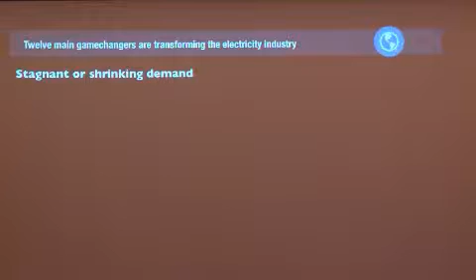Demand is more likely to go down than to go up, especially with regulatory reform that rewards lower bills, not higher sales.

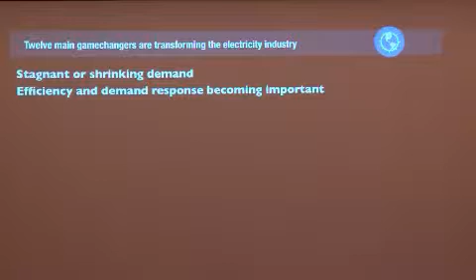Efficiency and demand response are very cheap, and in 3/5 of the United States, they can bid directly against electricity generation in auctions run by the grid operators. In a recent big auction, 94% of the winning bids were from the demand side.

Expanding returns to efficiency investments are also emerging, as I'll describe at the end.

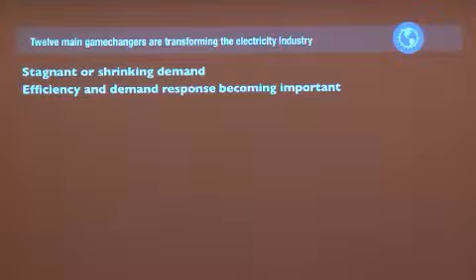Massive supply shifts are happening. Coal is going away in the world market. Nuclear is also fading as too costly to compete. Gas is improving but not cheap—prices are volatile and rising. And renewables and combined heat and power are taking over the global market, as I'll summarize in a moment.

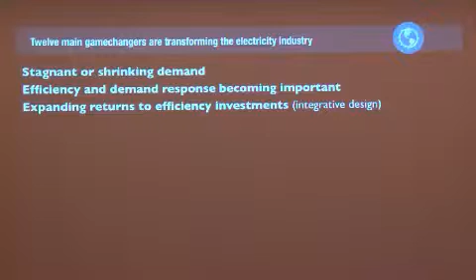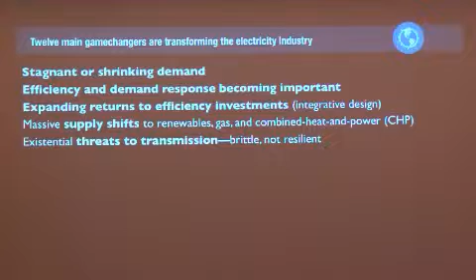There are existential threats to transmission as well. It is hard to build, especially in densely populated countries. It's fatally vulnerable to accident and malice, and resilience is becoming vital.

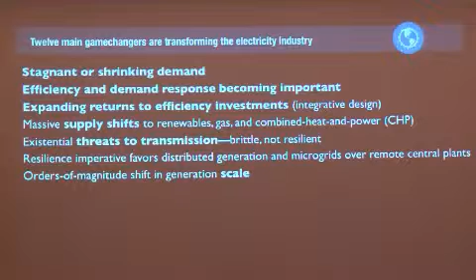I've mentioned the order of magnitude shift in the size of generators. Electricity systems are losing financial stability. And it's a little like what happened in the telecoms industry with cell phones.

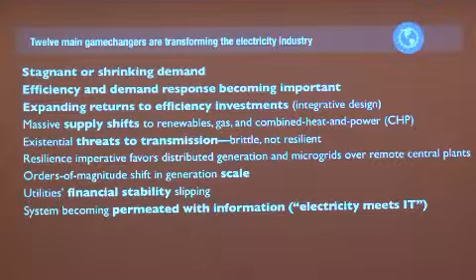The systems are becoming permeated with information—it's electricity meets information technology. So demand is becoming flexible, the grid is becoming more agile, and the need for central control of the grid is decreasing as intelligence becomes more distributed.

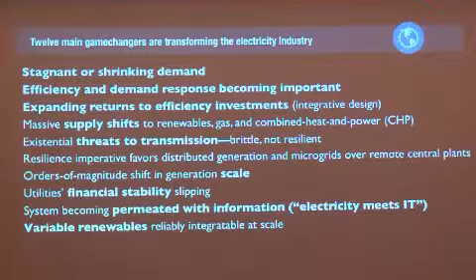Customer centricity is reshaping everyone's business and revenue and regulatory models, as utilities, customers, and a huge number of other entities compete not just in making electricity, but in providing many different services that electricity delivers to the users.

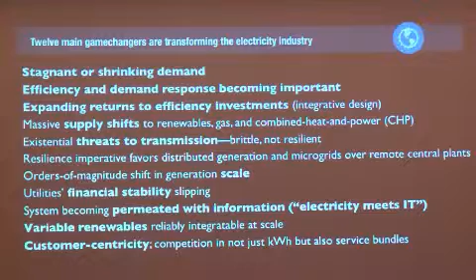So, will electricity institutions reform, learning to integrate variable renewables at scale? Will they reform before radical bypass shatters their old model?

Well, nobody knows, but as Jack Riggs says, the industry is entering a new world—more complex, dynamic, volatile, global, nonlinear, digital, virtual, and distributed.

Insurgents, he says, thrive there, unburdened by the legacies of physical and political constraints. No other industry, not even IT, is facing such a typhoon of swirling and potentially destructive changes all at once. These are exciting times.

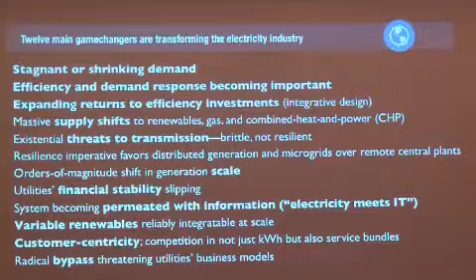Now, the world does continue to build fossil-fueled power stations planned long ago. The annual changes in operable capacity worldwide went down for nuclear. They've been going up rapidly for solar photovoltaics and for wind power. They have risen some, tailed off a little for hydropower.

And they're still fairly high for fossil fuel. Most of those plants were planned back in this period. And there was a big spurt in China, but two-thirds of those plants were not authorized by the Chinese government. They were built illicitly at local initiative. So no more nuclear plants are being ordered in any market system, only in centrally planned systems. But renewables now get more global investment each year than fossil and nuclear stations combined.

Renewables have added half of all new generating capacity in the world starting 2008, and they now add slightly more capacity than all non-renewables combined. Note that curves here for photovoltaics, for wind, these two will cross this year, and for other renewables not shown must be added together to make the renewable total, which is up here somewhere in the 80s of gigawatts added per year. And renewables costs are falling so fast that last year they got 12% less nominal investment than the year before, but they added 6% more capacity.

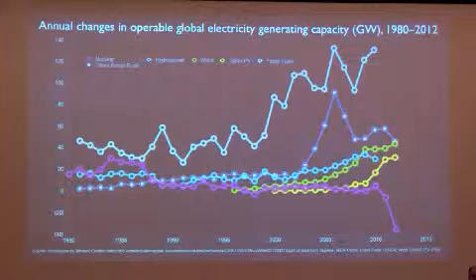So let's look closer at the two main kinds of non-hydro renewables, wind power and photovoltaics, and these are their annual net additions in the world. The capacity to make solar cells is now about 75 gigawatts per year, twice the rate at which they are being installed. But huge growth in China and increasing use in Japan will quickly soak up that surplus.

Electricity generation has become a scalable manufactured product, like making chips or mobile phones. It used to be that you had to build a multi-billion-dollar power station. It would take 10 years. But now, in those 10 years, you can build each year a photovoltaic factory, which each year will produce enough solar cells that each year those solar cells can produce as much electricity as your station would have produced after 10 years of construction. So the scaling is utterly different.

This is why all the old forecasts are wrong. They have not yet realized this new market reality. And thus solar cells are now scaling faster than cell phones did. Last year, China got more new electricity from non-hydro renewables than it got from nuclear and fossil plants combined.

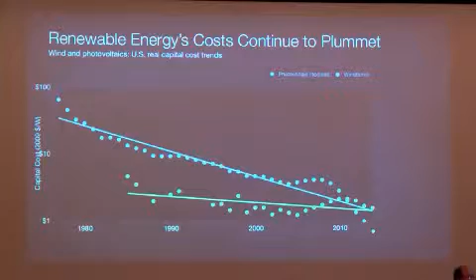And by the way, if you need any further proof of the global shift toward distributed generation, what the Economist magazine calls micropower, which is cogeneration plus renewables minus big hydro, has now more than exchanged its share of global electricity production with nuclear power, just because of superior economics.

Now, per hectare, Japan has 9 times the high-quality renewable energy resources of Germany, and yet Japan generates, excluding hydro, only 1/9 the renewable share of its electricity that Germany does. So why does Japan use least its most abundant energy resources, despite paying some of the world's highest electricity prices? Simply because Japan's utility oligopolies have for decades blocked competition in order to protect their old power station assets.

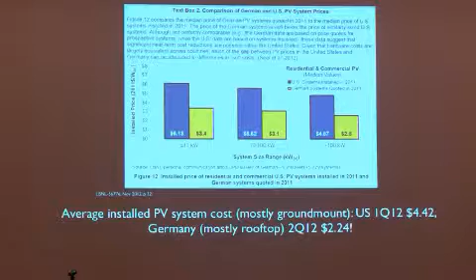So, of course, many of us then examined how Germany and also Australia are achieving such low balance of system costs. And then our installers started to use the same innovations. And some of our installers have already cut this balance of system cost by 50 to 70%, and some think in another year or two they will have cut it by 90%. This would actually beat the Department of Energy targets and bring photovoltaics to grid parity essentially everywhere.

And you can do the arithmetic that if the kinds of annual growth that are common in the mature microchip industry were applied to photovoltaics, it would take only into the 2030s or at most 2040s to have enough photovoltaics to meet all United States electricity needs in this way, although actually we would buy a mixture of different sources.

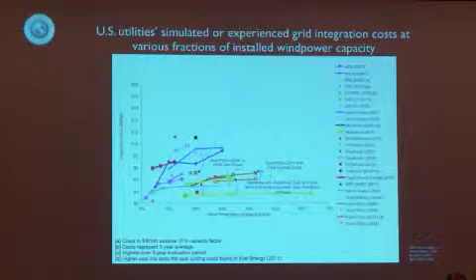Many people also suppose that it will be very expensive to integrate renewables, say wind power, into the grid. Well, many American utilities with many different conditions have studied if you have this much of your capacity coming from wind power, here's how many dollars per megawatt hour it will cost to integrate it into the grid. And it's typically just a few yen per kilowatt hour. It's a few percent extra cost, and it's probably less than the costs of integrating big thermal stations into the grid, requiring big reserve margins and spinning reserve and so on. We need to count that also.

Of course, if you allow renewables, let alone efficiency and demand response, to compete fairly against new supply, as we now do in 3/5 of the United States, what would you expect to happen? Well, this condition actually was tried a long time ago in California when they had 37 gigawatts of peak load. And the result was that in less than 3 years of bidding, they got much more than that,

143% of their peak load in distributed generation, mostly renewables, that had been bought or was offered, and also in efficiency they had bought. And they had to stop the auction because in a few more months they would have had to close every fossil-fueled station in California, which would have been a good idea. But I think this suggests that if you really have full, fair competition, even with old technologies, much worse and costlier than today's, you'll probably have too many options, not too few.

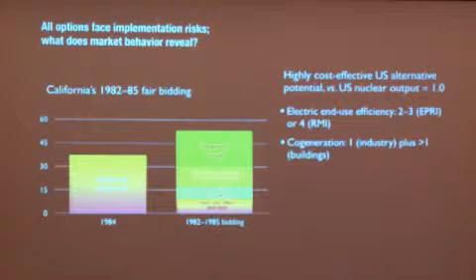Perhaps that's exactly why Japanese utilities are so afraid of such competition. It gives more choices than they are offering. And these are extremely large resources. I don't think we need to go into that now, but they're much larger than we need.

Another common myth is that solar and wind take a lot of land. Well, I recently did a peer-reviewed paper reviewing this claim and found that exactly the opposite is true, that actually photovoltaics on the ground have the same land use as the nuclear fuel cycle according to the official government assessment, or zero if you put them on buildings, as most now are. And if you put them on just a few percent of US buildings and other structures, that would give all of the annual US electricity needs.

Wind power has about 1 or 2 orders of magnitude less land use than either of the other systems, and thousands of times less if you don't need to build dedicated roads. And the common fallacy here is to count as land use the area that the solar or wind equipment is spread across. But in fact, this land is widely used for other purposes. 99% of a wind farm's area is used for farming, ranching, or wildlife or recreation.

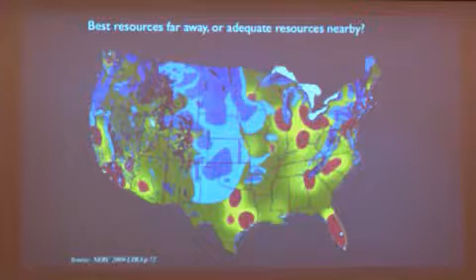So I think we need to look at this sort of pattern, as also in Germany, where they've now canceled half of the planned transmission expansion, and the latest studies say they won't need the other half either. And especially as we get new wind machines just entering the market that operate very efficiently with low wind speed, this changes the picture completely.

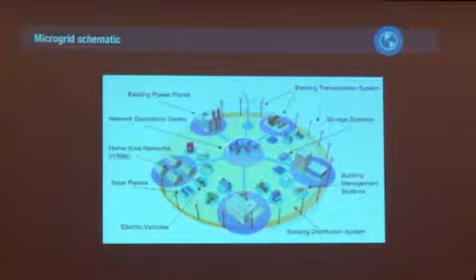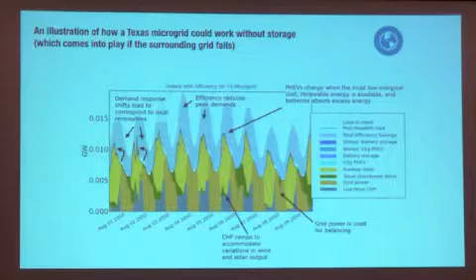It's been used in Cuba, it's been used in my own house to let the local generator work with or without the grid. And there are hundreds of examples worldwide of microgrids that have been analyzed in detail and showing how they would work even without the grid to avoid big blackouts. I'll just skip some of these.

Cuba actually went from 224 blackout days to 0 in 3 years. And then when 2 hurricanes in 2 weeks shredded parts of the grid, they were still able to maintain critical services in the rural areas.

Now, resilience is a very important argument for distributed microgrids that can disconnect fractally, reconnect seamlessly, using, for example, gas-fired cogeneration, using local renewables like solar power on your roof in a way that works with or without the grid. But there are also powerful economic arguments, which we set out in this book in both languages,

showing 207 distributed benefits, mainly from financial economics and electrical engineering, that can increase value often by about tenfold compared to central stations. And our eLab has just published a nice summary of such analyses. I won't go through all the detail of it, but showing that often the distributed benefits are worth as much as the total cost of solar power or more.

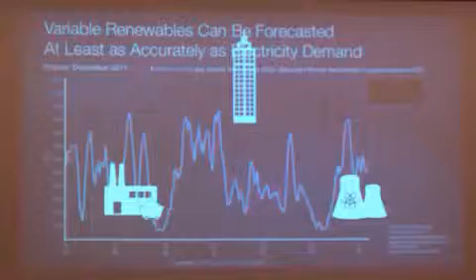Now, I'd just like to show you a quick simulation here about how the grid is constructed. Many people say that we need the fossil-fueled and nuclear stations to keep the lights on because they run all the time, but solar and wind power are variable and thus supposedly unreliable. But actually, no power station runs all the time. They all fail. And when they fail, you lose 1,000 megawatts without warning, typically for weeks or months.

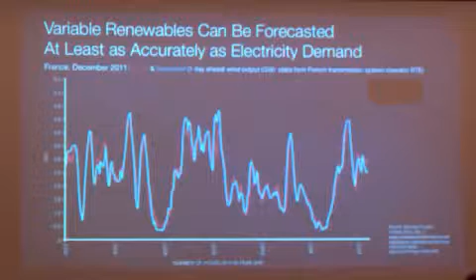But both parts of the statement are wrong, because variable does not mean unreliable. The blue line is the forecast of French wind output during a very stormy month. The red is the actual output 1 day later. In other words, the day-ahead forecast was extremely accurate. And we can now forecast both solar and wind power more accurately than we can forecast demand.

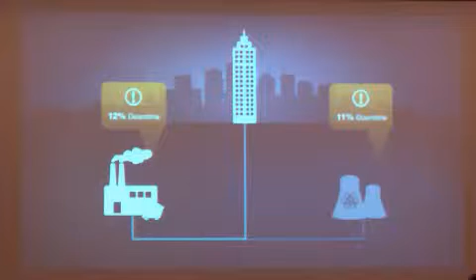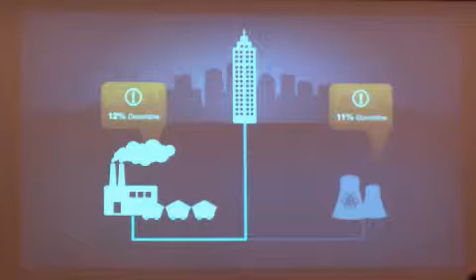But also, when these big plants fail, the grid is designed to back up failed plants with working plants. And in exactly the way that the grid manages this intermittence of big thermal stations, it can also manage the forecastable variations of solar and wind power. So very detailed studies in Europe and in the United States have shown that you can, in fact, run a highly reliable grid on 80, 90, 100% renewables.

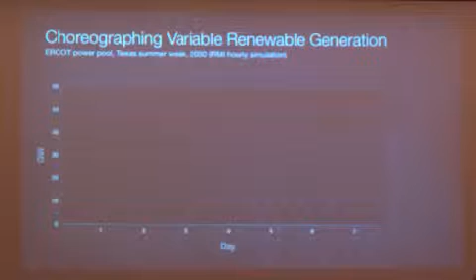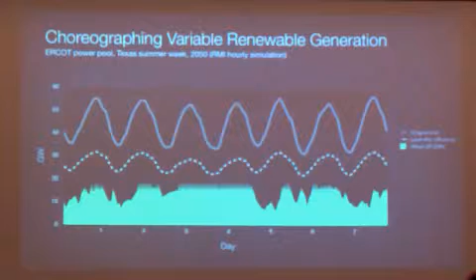And I want to show you at the end here one very striking example that we simulated for the isolated Texas grid, which in 2050 should have a summer load shape in 1 week like this, or smaller and less peaky with profitable efficiency. Now, let's meet all of this with renewables. And this grid is not connected to the rest of the United States. It's just Texas.

So we first put in wind and photovoltaics. You can see they do vary a lot. Then we meet the last 14% of the annual electric needs with other renewables that you can have whenever you want.

Geothermal, small hydro, solar thermal electric with storage, burning municipal waste, burning biogas from the cattle feedlots in combustion turbines. So we're now 100% renewable, but you can see it doesn't very well match the load curve.

But now we can take the surplus and put it into distributed storage in smart electric vehicles and ice storage air conditioning, get it back when we want it, and then meet the last bits with unobtrusive demand response. So now we have fully reliable electric supply every hour of the year, and only 5% of the renewable generation is left over to be spilled. So the economics will be very good.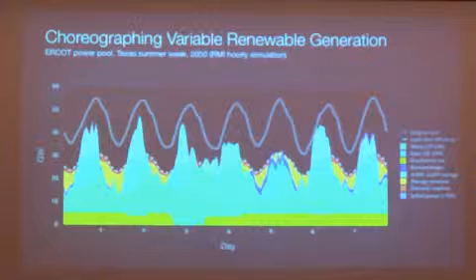And I think this is really the way forward, and the reason that the chief energy regulator in the United States says that these big thermal plants have become an anachronism and we may not need any more of them ever. So I end with this set of numbers for you to think about. We're often told that renewables can only play a small role in electric supply.

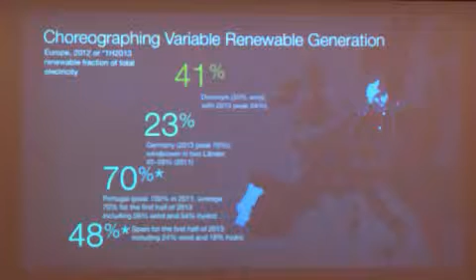Well, different laws of physics seem to apply in Europe. 23% renewable electricity all last year in Germany, 41% in Denmark, and they had the most reliable electricity in Europe. In the first half of this year, Portugal's power was 70% renewable, up from 17% just 8 years before. Spain, 48%. The lights stayed on just fine, and some of the operators say, we hope we never go back to the old system. It's so dull compared to this.

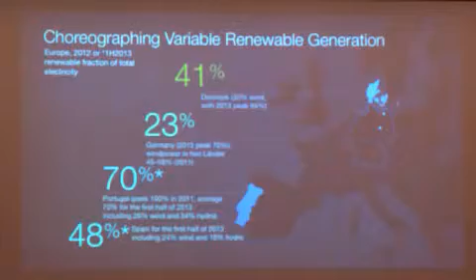Thank you very much, Dr. Lovins. I'm sure you understood that the whole world is heading into a great transformation to a distributed, renewable-centered system. We have recently published a brochure at our foundation, which is based on this.

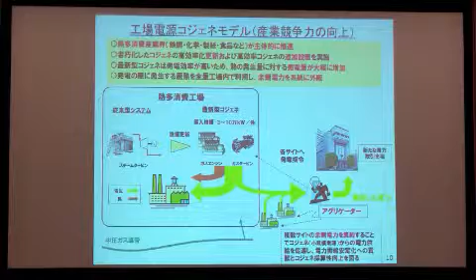For sales of surplus power in the market, starting last year, a green energy market has been set up, and the trading in the green energy market has started. We aggregate about 20,000 kilowatts of power.

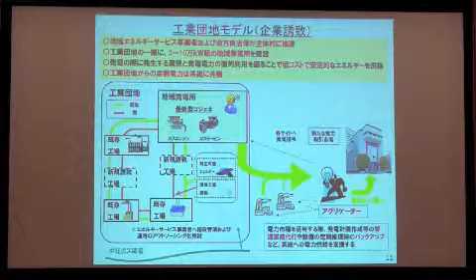And we sell in the market. So that's a plant-based power supply model, and this one is an industrial estate type of power supply model. Consideration and study is being underway in multiple sites.

And the final model has to do with the urban development model. Based on the experience of the March 11th earthquake, in urban areas, these building complexes, commercial buildings and shopping centers, about 50% of the usual demand, if that can be supplied by a standalone type of own power supply, even if there is some failure on the grid, the security power supply can be secured.

For example, there are many elevators, so one of those elevators at minimum can be operated even if there is a grid failure, and air conditioning would also work. Also in case of disaster, we would like to accept people visiting the site or the neighborhood, and that will lead to a business and living continuity plan, we feel.

So a certain size building complex in the development of such city complexes, a certain amount of standalone power supply will be installed. In case of development of a building of 200,000 square meters, power demand will be about 10,000 kilowatts. And if cogeneration is half of that, and if we assume 43%, then we will be able to introduce generating capacity of 43% efficiency gas turbines.

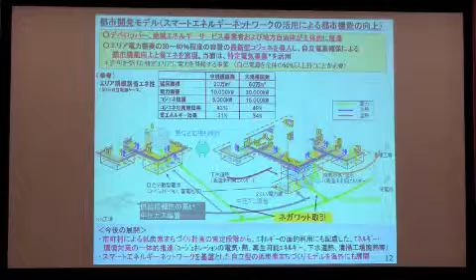In the future, dynamic pricing for power trade may set the peak power price very high. If that happens, peak load must be reduced, and for that, negawatt trading will be useful. If that can be used, economic viability will improve further. For that, low carbon type of city planning will be very effective, and I think we'll be able to contribute overseas as well.

This is not part of your handout, and this data is not made public yet. It's being compiled by the Advanced Cogeneration and Energy Utilization Center. Currently, about 10 million kilowatt cogeneration will be increased threefold by about 2030 to about 31 million kilowatts.

That's the installed capacity, and the total generation will be 155 billion kilowatt hours. That means about 15% of total generation can be supplied by cogeneration.

Through the shale gas revolution, we expect the natural gas share will be reduced from the current 70% to 60%. And then we will be able to introduce power supply based on relatively low cost.

Also, there will be further deregulation and introduction of fuel cells for household use. If we add up all these effects and benefits, I think we'll be able to contribute to restructuring the overall energy mix and energy use in Japan.

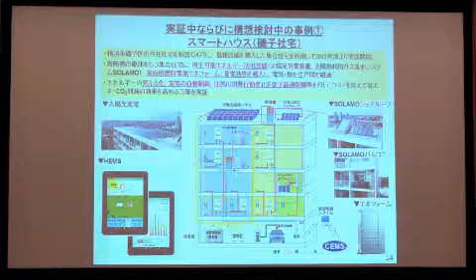Overall integration is done by the community energy management system. We are doing demonstration and testing of fuel cells, not just one or two introduced, but 2 fuel cells introduced per unit, and we share the power among the units. So with visualization and such integrated control, the power demand can be reduced by more than 20% according to our results.

As for home fuel cells, from 2009, as you can see here, PEFC, or polymer electrolyte fuel cells, has been sold. Right now Panasonic and Toshiba are selling PEFC with 39% power generation efficiency, and more than 90% of total efficiency can be gained if you use up all the power.

And as a next generation, SOFC, or solid oxide fuel cells, have been launched. I just started.

At high temperature, the efficiency of the generation is more than 45%, higher than the grid efficiency, and the overall efficiency is more than 90%.

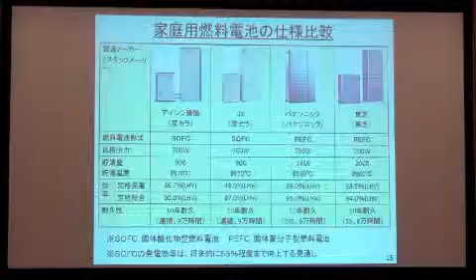Now for the fuel cells, this started in 2009, and now at Tokyo Gas about 30,000 units, and nationwide 70,000 units have been installed.

There's still a subsidy system, 450,000 yen per unit of subsidy, and the end user's initial burden is about 1.2 million yen. By 2015, the subsidy system will remain. So towards that, we are working on reducing the cost so that after 2015, the end users' cost burden will be reduced to 800,000 yen. That's our target.

800,000 yen - if that is achieved, and it has hot water supply equipment, it can be recovered over 10 years or so. 50 to 60,000 yen of energy saving per year in the detached house, which can be recovered in 10 years. That's the model we're targeting.

It will be introduced to the condominiums, and also with the expansion of electric vehicles, the similar technology can be applied for further cost reduction, and also to roll them out overseas.

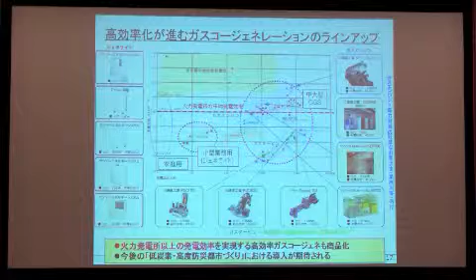But for a smaller system, the fuel cells have high efficiency, whereas the gas turbine efficiency goes down. So for a smaller scale, fuel cells, PEFC or SOFC, utilizing waste heat or hybrid type turbines, can gain more than 50% efficiency. So with such a product lineup, we would like to promote cogeneration.

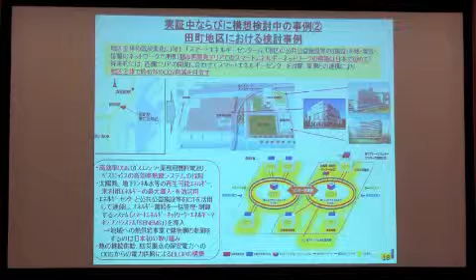Now, in the town building models, let me share some case examples. In front of Tamachi station, this is the development we're working on. After 2014, the buildings will be built starting next year, with high-efficient cogeneration combined with solar power, with photovoltaic, made into a network.

Using ICT, it will be controlled. So the smart energy network, energy management system, SENEMS, together with Hitachi, is being developed right now.

From the Energy Center, the data on the demand side is looked at. So rather than simply supplying energy as needed, there's control from the demand side - a demand response. So the optimal energy control system will be introduced.

As we do so, be it renewable energy or less CO2 emission energies, it will be prioritized for usage, to promote CO2 reduction and energy saving.

As for others, in Nihonbashi Muromachi, done by Mitsui Fudosan, total floor area is 1 million square meters, with 50,000 kilowatts demand, so 25,000 kilowatt cogeneration for power in case of emergency.

In any accidental case, to have self power generators and cogeneration that can operate continuously, so even for a long period of blackout, about half of the power demand of these buildings can be accommodated.

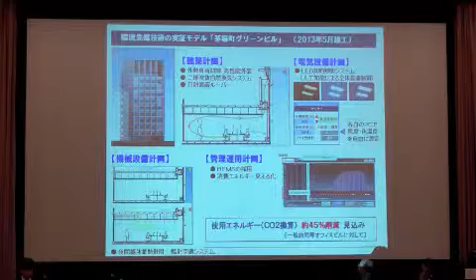There is an intelligent lighting system, and the user can choose the optimum control, and also near real-time type of energy use, so power use is made somewhat visible to the users. On top of the visualization of energy consumption, whether this will be linked to demand response or not will be the issue for the future. The estimate is 45% energy consumption reduction.

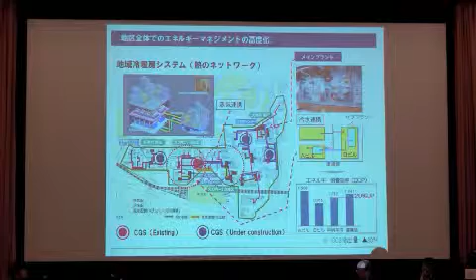So depending on the management of the completed buildings, the heat use or heat consumption changes. So in the future, in addition to introduction of cogeneration, heat and power will be produced in a synchronized way. So energy management has to be made more advanced in this kind of an integrated way, and that will be a challenge going forward.

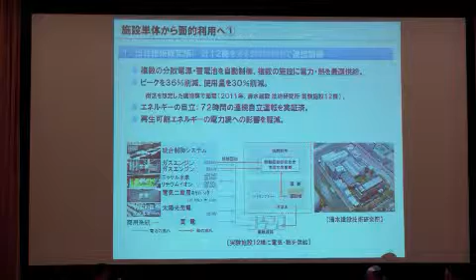So the first example is our company's Technical Research Institute. There are 12 buildings, and they are connected through the microgrid. In 2006, this was completed. And according to this data, as of 2011, 36% reduction at peak, and the usage was reduced by 30%. Gas engine cogeneration and batteries, nickel hydride and lithium ion, electric double-layer capacitor, and renewable energy photovoltaics with some power purchase, using waste heat of cogeneration.

And with this as a case example to be rolled out to others, this is Chubu University with 12,000 students in Aichi. In accordance with the campus plan, the life science faculty built a new building. For this new building, smart BEMS, cogeneration, photovoltaics and storage batteries are introduced, and with this as a core, by faculty department basis, this will be expanded, and at the end, the entire campus will be made smart. Step 2 was completed in summer this year, and they're now moving into step 3. As of last summer, 25% power saving and 30% energy saving was achieved.

Likewise, from a single facility to create an area energy network, if there's a new building or a large-scale retrofit renovation, by focusing on that particular area and neighboring buildings, provide heat and energy so that we can improve the BCP or accommodate a peak. So key technology is distributed energy, renewable energy, or batteries. So in an area-wide way, to operate smart BEMS will be necessary.

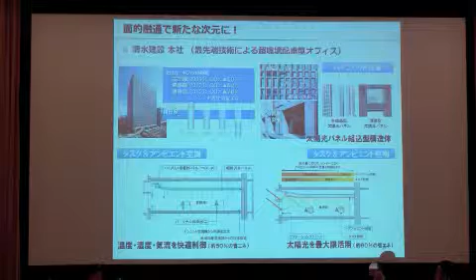And for AC, task and ambient AC, using a radiant panel ceiling, and desiccant AC is used for adjustment of the humidity from outside air. So cooling water is supplied from the DHC system, or instead, chemically to absorb. But if you just keep it absorbed, it would saturate. So using waste heat to recycle.

So we get the heat supply from the area system. At the top is the existing system of coming back with 6 and going with 14. But the radiant AC is functioning between 16 and 18. So 14 or 15 degrees of cooling water that comes back are used as it is to cool our building. At this temperature, there are several in the natural environment, so this can be applied in wider areas going forward.

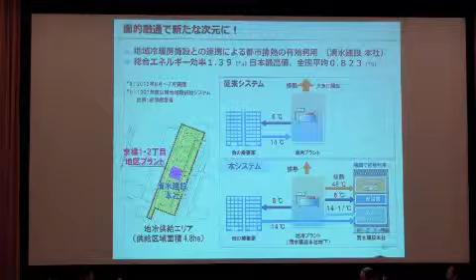And for desiccant AC, to recycle the absorbed, and here the water is to be released. Waste heat is used to produce cold water. So 1.39 for the comprehensive energy efficiency, which is Japan's highest figure now. So to promote this is very important.

So there are many ways to develop cities, but there are three ways. First is a disaster prevention type, enlarged redevelopment type. And as Mr. Muraki of Tokyo Gas explained, those large-scale projects such as Tamachi Station are included here. But it's not that there are many of such large redevelopment types. So in the existing buildings, how can we expand the area? So we call it the sequential development type.

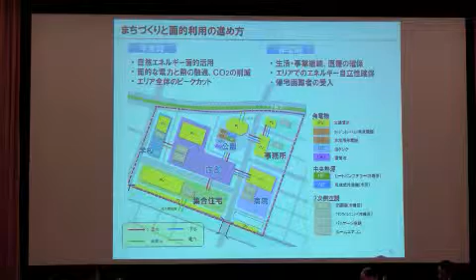As you can see at the bottom, in a certain block, if there is a new building, then focusing on that new building by introducing cogeneration or batteries, for maybe 3 buildings next to it, interchange the heat and energy to improve the energy efficiency and improve the BCP. So this is one example for simulating that. And with that as a base, we have identified some challenges.

Or in reality, there's even more difficulties. We are a design team. There are challenges at the planning and design stage. It's very difficult to get the consensus building on area energy network from the initial design stage. So to motivate the related people to reach a consensus, such incentives or regulations will be helpful, and it requires a certain initial investment. So it's very difficult to make it profitable. And if you are to work on this, the demand side may actually decide to stop participating. So the risk avoidance on that would be a key as well.

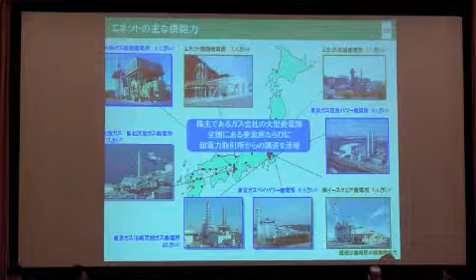Very clean natural gas power is supplied from Osaka Gas facilities, and we buy power from 150 locations all over Japan, and we sell it to our customers. In terms of the power supply, about 70% are from Osaka and Tokyo Gas natural gas fired power plants, and then renewable power sources, wind power, photovoltaic, bio and mini hydro. On the upper left, this is in Hirokawa of Wakayama Prefecture, and it's a wind farm. And under that is Miyazaki Solarway photovoltaic power plant, and also a biomass generating plant.

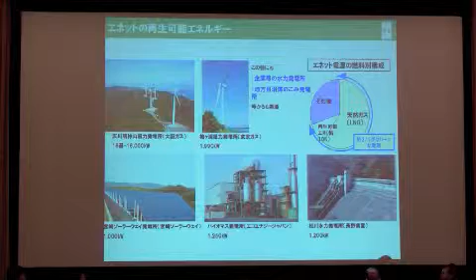So we buy these clean power sources, so it's a very clean energy mix. And we have about 15,000 to 16,000 customers. Last year it was 10,000, but in one year we were able to rapidly increase the number of customers by 5,000 or 6,000, covering from Hokkaido to Kyushu. Unfortunately, Okinawa is an island, so excluding the area covered by Okinawa Electric Power Company, we provide electricity and services.

And ENET's power sales per year is 10 billion kilowatt hours, so it's slightly more than that of Okinawa Electric Power Company. Having said so, however, and this is a problem, the share of the PPS, the new entrants, is only about 2% of the total power supply, and we work to pressure the government, and various systems have been set up, but we'd like to continue to increase. And among the new entrants or PPSs, ENET's market share is 50.5%. That's all for the introduction of our company.

Since the March 11 earthquake, customers' awareness has changed. Before the earthquake, cogeneration was positioned in terms of energy conservation, economic viability and CO2 emission benefits, but since the earthquake, power saving or emergency security improvement, BCP, energy diversification and introduction of renewable energy sources. So the customers' awareness has changed greatly, and we need to cope with the time of tight power supply, as well as with emergencies and disasters.

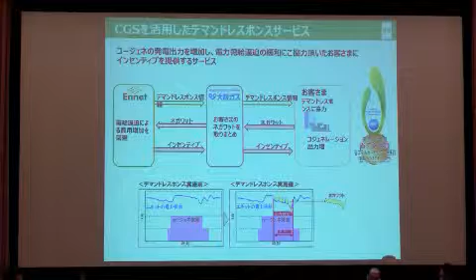And there's a negawatt aggregation service and a smart network service. Using cogeneration, this demand response service was awarded the Energy Conservation Award last year. ENET and Osaka Gas jointly developed this service, so ENET, Osaka Gas, and customers are involved in this process. So in case of tight power supply, some cogeneration may have stopped operation, and we request the cogeneration plants, if they have some room, to increase power supply. And for customers who comply with the demand response, we give incentives.

And there are various advantages or benefits. In terms of economic viability, customers' cogeneration load may be reduced, or some of it may be unoperational. But by introducing incentives, we will be able to reoperate some idle cogeneration power. And if we have to buy power from outside on a spot basis, that will mean increased cost. So by implementing demand response, we can reduce this costly spot procurement. And this is a win-win-win model for all the stakeholders.

And this is an actual example. There is some time period in the middle where the bar chart is lower. This is when the customer operated the cogeneration unit, and the purchased power went down.

And this is an example of a smart community project in Miyako City, and this is going to be implemented in the future. There are various benefits of a smart community, for example for the local power source, local customers, or local new entrants. For the local power supply, they can make use of the feed-in tariff, and they can secure a stable supplier. So biomass, photovoltaic, and mini hydro can be used.

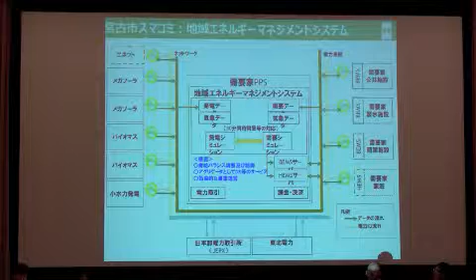So local smart communities are being discussed in various parts of Japan. And as far as ENET is concerned, using SEM system or balancing power system, we have the know-how. So we'd like to work for an optimum combination of that know-how.